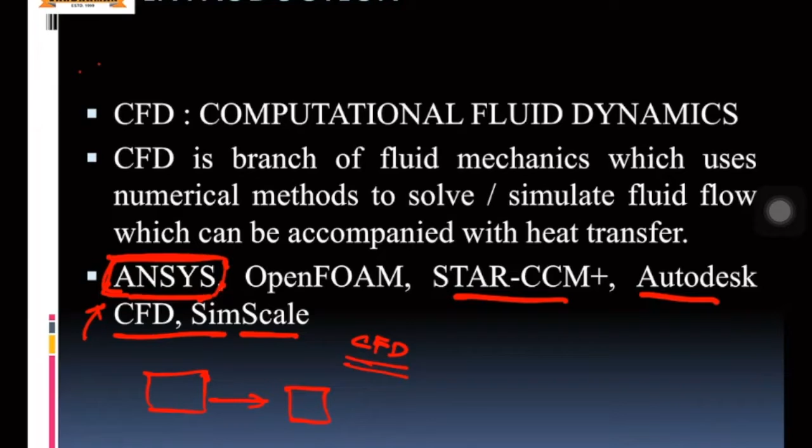But in such cases, especially when it comes to flying objects, these are not possible experimentally, obviously because of the cost involved, you can't just hit and try each and every design. Moreover, there can be a logic that wind tunnels are there, we can do the experiments there, but even wind tunnels are a costly affair. Whereas if you talk about simulations, be it the code made by any person, or be it a professional software, these simulations are very easy to do.

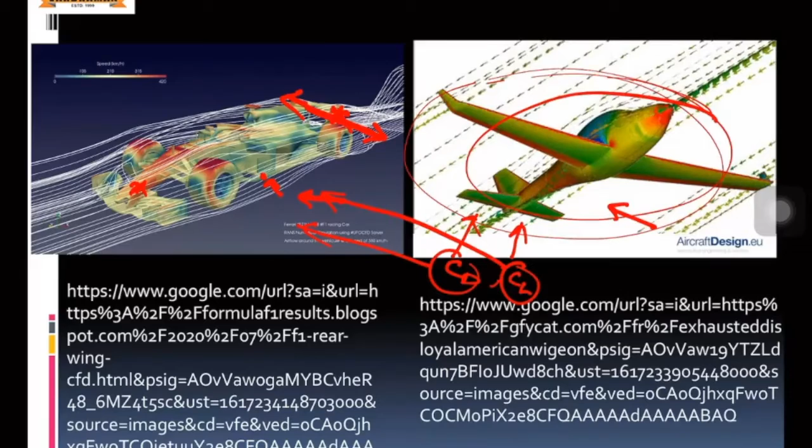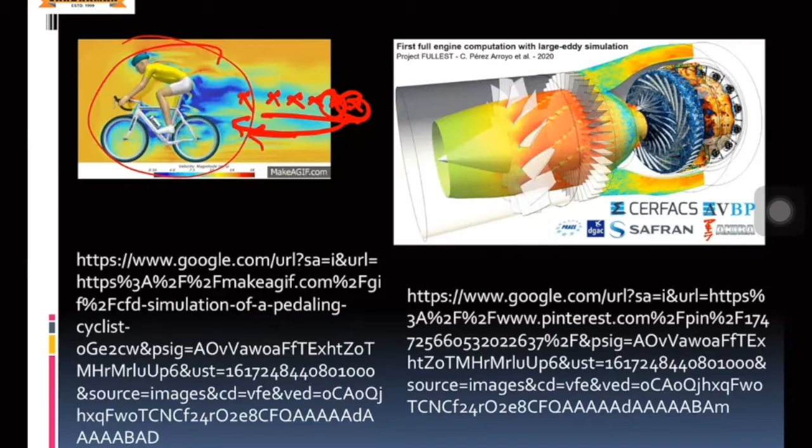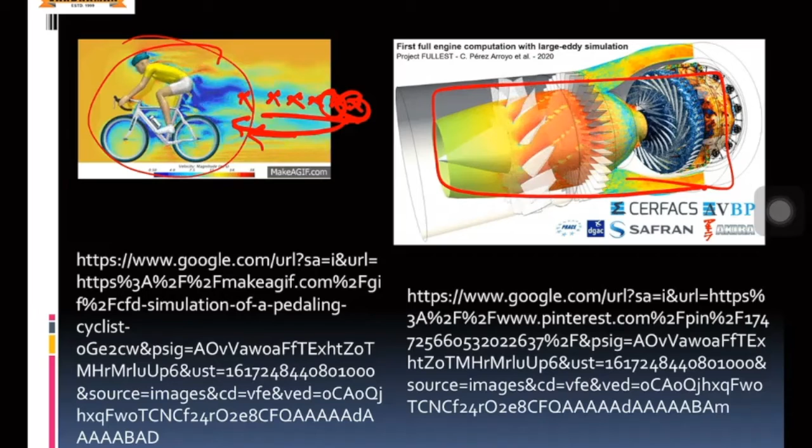So there also they are using CFD, and of course in engines and all, flow across an engine. So there also you can do simulations and study a lot of things, thereby optimizing the design of the engine. Heat exchanger might not be a new thing for most of you, but again, talking about heat exchangers, if you want to do it experimentally, in every nook and corner you can't have the values of velocity, pressure, or see the effect.

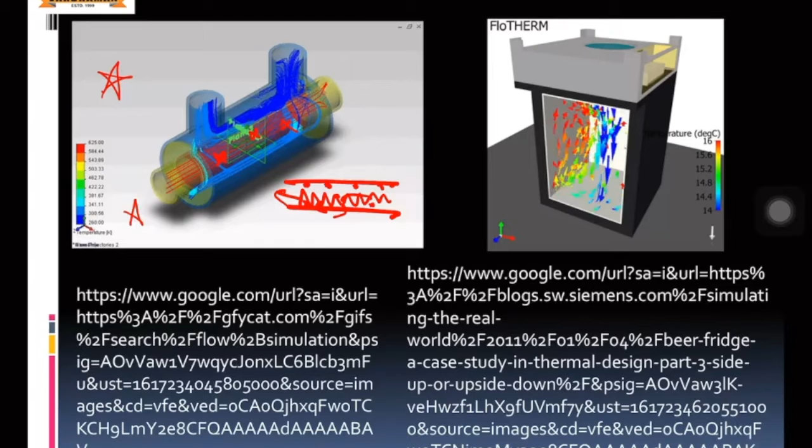Recently, some of my colleagues are trying to do experimental studies on a corrugated plate heat exchanger. So for them, getting this shape of corrugations inside a pipe becomes a challenge itself. And further adding to that, if I want to change the shape, if I want to change the pitch, then experimentally it becomes almost next to impossible. Somehow, even if they are able to make these corrugations, studying the values at each and every internal point becomes the biggest challenge. So in such cases, simulations can be of very much great help.

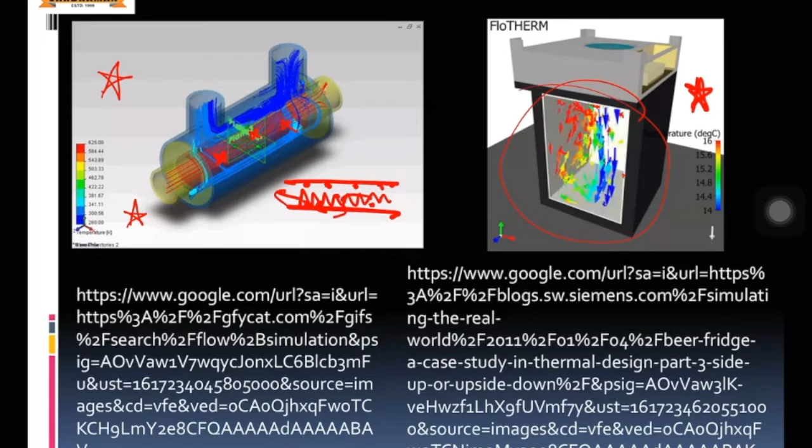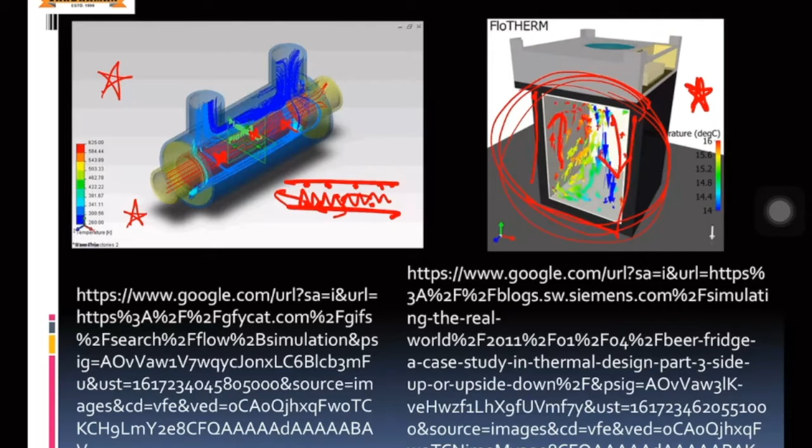Similarly, these things. This is the challenge which I faced when I started teaching basic mechanical engineering, or the thermodynamics part. When we study thermodynamics, most of the students know that in the name of thermodynamics, it is zeroth law, first law, second law, or let's say entropy. That's the end of it. But if we are able to show such simulations where in, let's say, a refrigerated space, the hot air which is red is going up and the blue cold vapors are coming down, then it creates a lot of interest among the students. They are able to see the actual way it is happening, and we can do things like that.

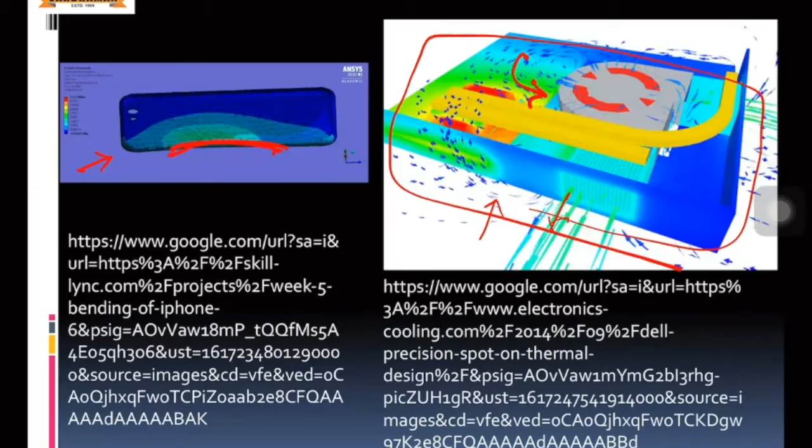You can call it either electronic cooling or electronic packaging, and it is very useful. Considering the present aspects, if you talk of mechanical engineering, especially thermal, this can be an area where we can get ourselves trained and also our students trained, so that they will be getting a lot of potential jobs in the coming times.

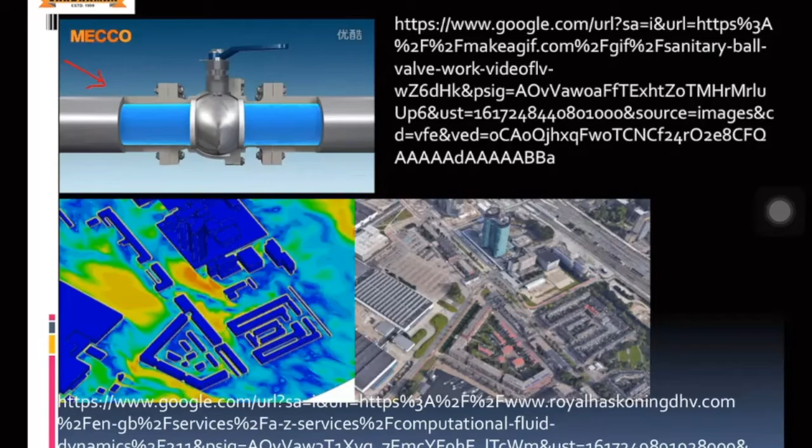In these examples I've taken, the first example is general fluid flow through a pipe: how, when the valve is opening, the fluid is affected. The second example you're seeing here, and the actual geographical photo, is also very useful in these times. Recently, we are talking a lot about smart cities and green buildings. Even in those cases, CFD can be a very good tool to design how the flow is happening across the city, and it can be used for a specific building also. Usually we apply Vastu and all in structures and buildings, but even this can be very helpful.

One good experience I can narrate relevant to this: if any of you have been to IIT Delhi, the basic shape of IIT Delhi is like a C shape. There's one tunnel, a small passage which connects the computer building with the main building. That tunnel is designed in such a way that throughout the year, whatever the weather or season, if you go and sit inside the tunnel, you will always feel a smooth breeze. It's a very soothing experience. So that's also an example of design of a building using the concepts of fluid mechanics and CFD.

And here, of course, you can see the planning of a smart city. On the left side they are showing the animation of how the flow can happen in a smart city. And this is the photograph of the same city.

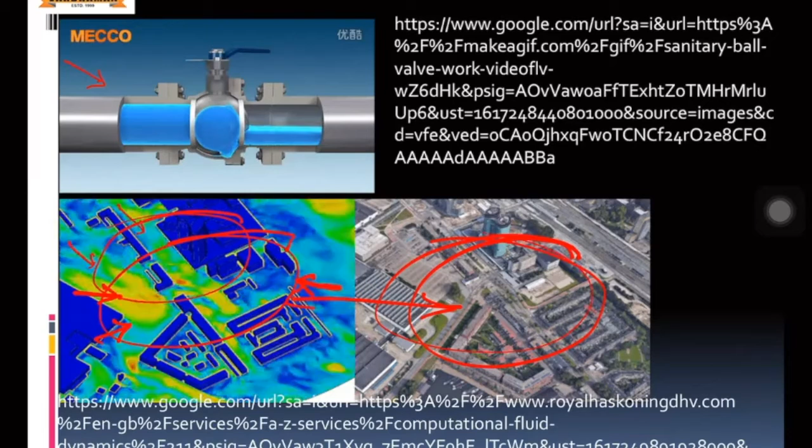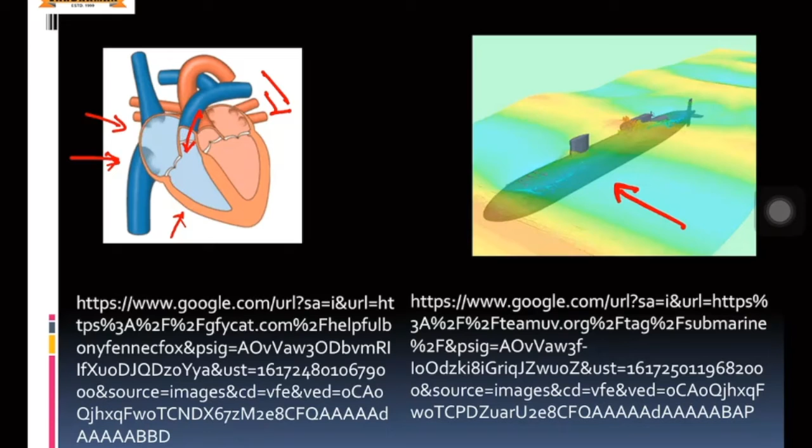But here they are coming to the help, and they are telling a lot of things about the functioning of heart. Even these days, when it comes to submarine or even underwater vehicles, UAVs are a very common concept these days, to send UAVs to such places, like especially in floods, we can send UAVs in such areas where human lives can be costly. So we can send UAVs. So even for those applications, CFD is coming to the help.

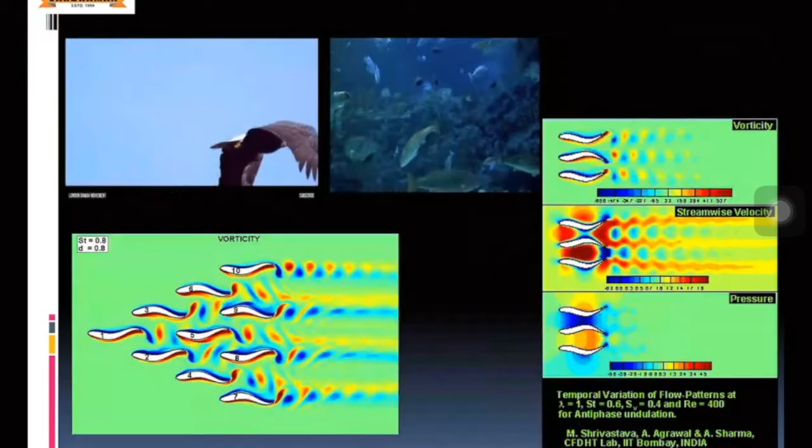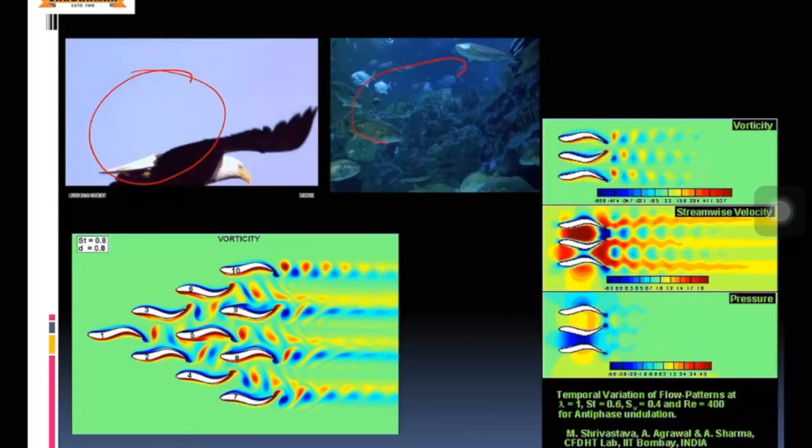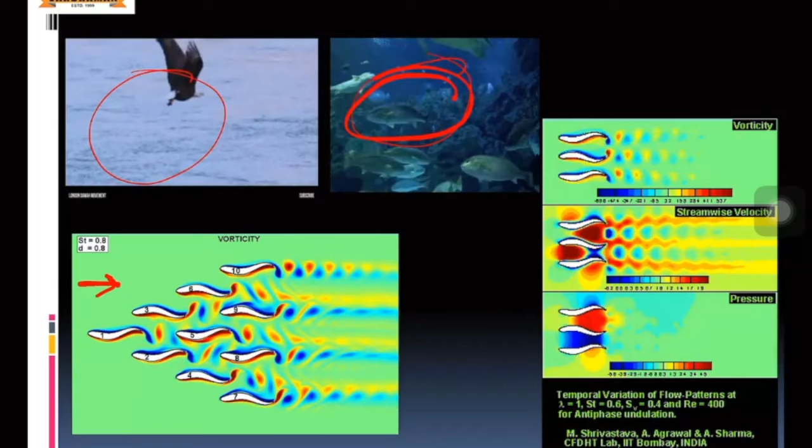And this slide is just a representation of the sort of work which I did in my PhD. Nature is the best source of inspiration, be it the birds flying in the sky or be it fish swimming in the water. So taking the inspiration from the fish swimming, I had simulated this, what we call a school of fish, and these are representing the vorticity which is being shed downflow.

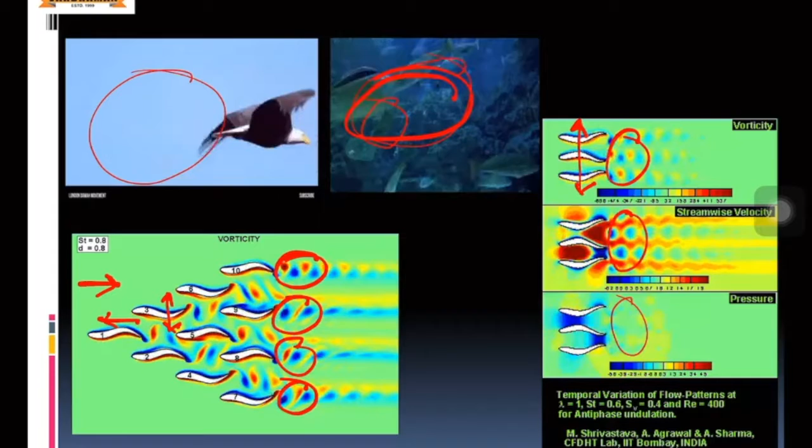And similarly, these are like three fishes swimming side by side, and these are the vorticity, stream, velocity and pressure contours. These can be very helpful in order to understand the working or the flow of UAVs, because we can learn a lot of things from fish, but we can't direct them that you have to flow like this, you have to undulate your tail at a certain frequency. So learning from fish and their motion, we can simulate the same thing and see the effects.

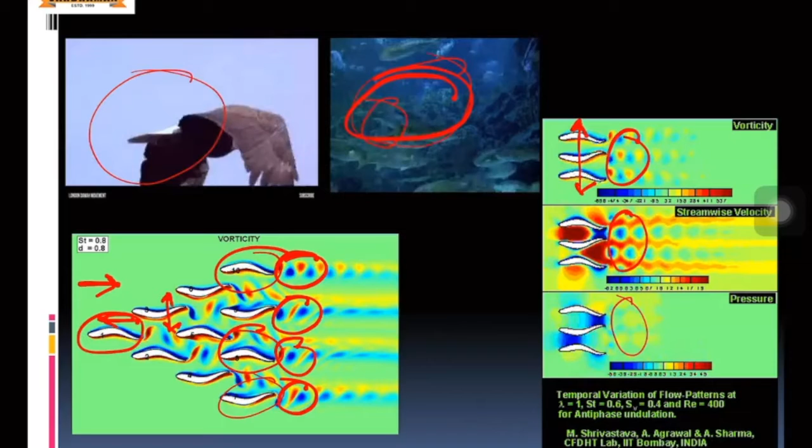A very lovely example of this group type of swimming, or even you might have seen that when birds fly, they fly in a similar structure. The advantage or the disadvantage is the leader, which is here at this point. This leader has to put in the maximum effort to fly or to swim, whereas those who are in the later half are relatively at rest; they have to put in less effort to do the same.

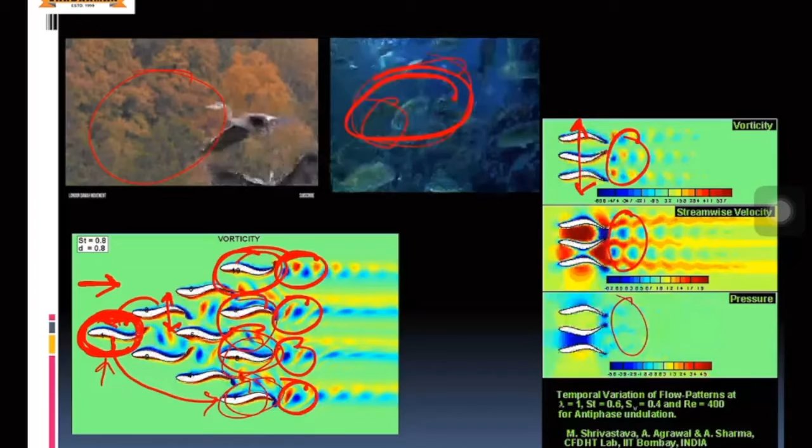So in fishes and even in birds, it has been observed that after some time this leader comes backwards and the other one comes forward. So it shows that this fish or this bird puts in maximum effort, then they come back to take relative rest, and the second one takes charge. So these types of observations we can validate from our simulations. This is one important thing.

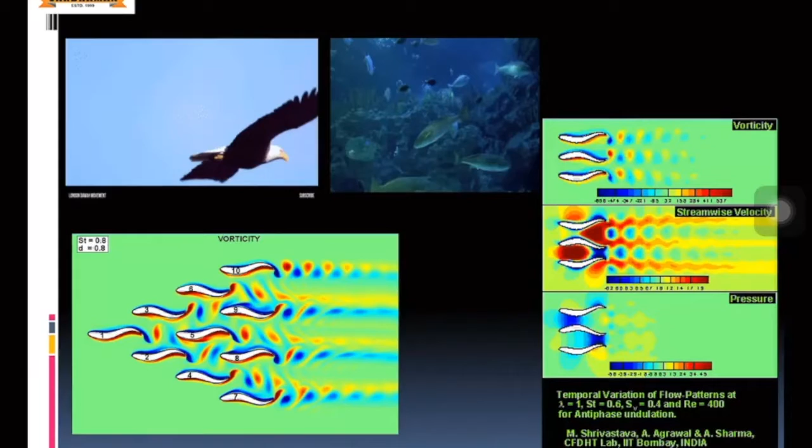Then the second thing is why CFD is needed. Okay, CFD is there. We are doing a lot of things, but there should be a reason. Why not just use fluid mechanics equations or thermal equations or structural equations to do the analysis? Why do we need CFD?

So the answer is, for a fluid flow problem or even other problems, we need a complete solution in a complete flow field. By flow field, let us say if I take an example of a room, and if I want to see temperature, or if the fan is running, the velocities at different points, or even if I put an air conditioner here and want to see the effect of airflow, temperature, and all these things, then I need a complete solution in this room, be it this point, this point, or this point.

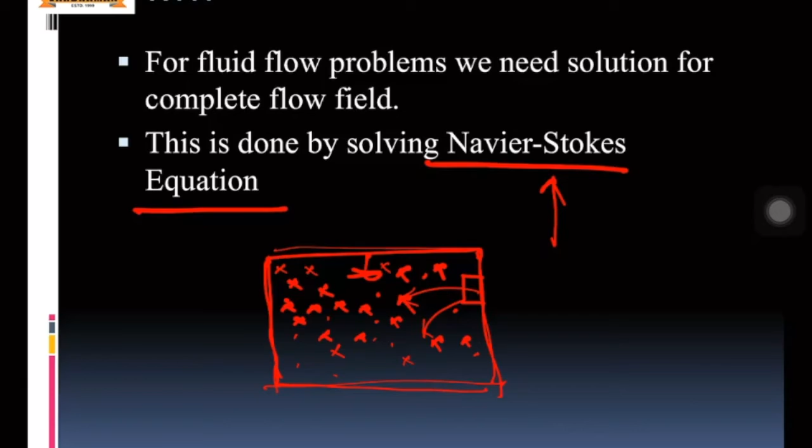So if we are not able to find out, I'll come to that. These are the Navier-Stokes equations that I have represented here. I have taken them from a certain website just to show them to you. So an analytical solution of the Navier-Stokes equations is not possible. The day someone is able to find an analytical solution for the Navier-Stokes equations, that will be the day we will not be needing these softwares, whatever softwares are there.

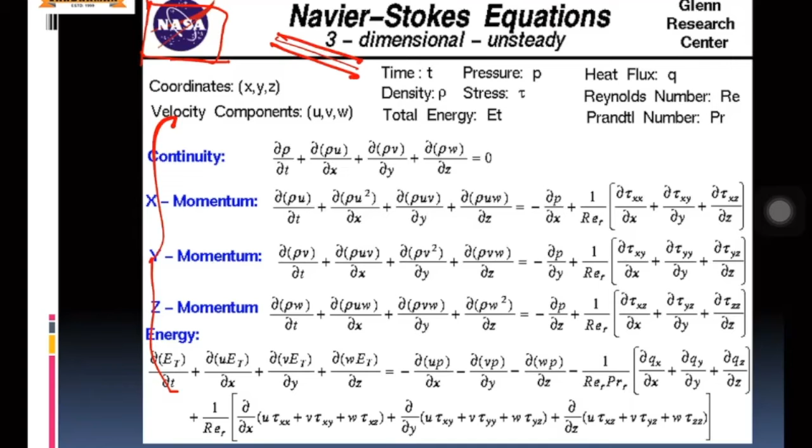So it's a very big challenge. I hope someday someone is able to find the analytical solution to it. But till that time, we'll be needing CFD, we'll be needing the numerical methods we are using. So I've told you that we need certain continuous solutions, we need the solution of the Navier-Stokes equations, and analytically it is not possible. So if it is not possible analytically, then what is the way out?

So this is how a study of CFD, or computational fluid dynamics, is done. First of all, in order to solve the Navier-Stokes equations, the numerical methods come to our rescue. All of us, at some point during our BTech, might have studied a course called numerical methods. I think in our university it is called NACP. When you talk of numerical methods, there are three different methods: finite difference, finite volume, and finite element, which we can use to solve the Navier-Stokes equations and get the solution.

The major difference between finite difference, finite volume, and finite element is that finite difference is solved at discrete points. Okay, we discretize the equation. I'm not going into too many technical details, assuming that this is just an introductory talk to give a taste of CFD rather than going into too many technicalities. So I'm assuming that and following the same thing in the explanation.

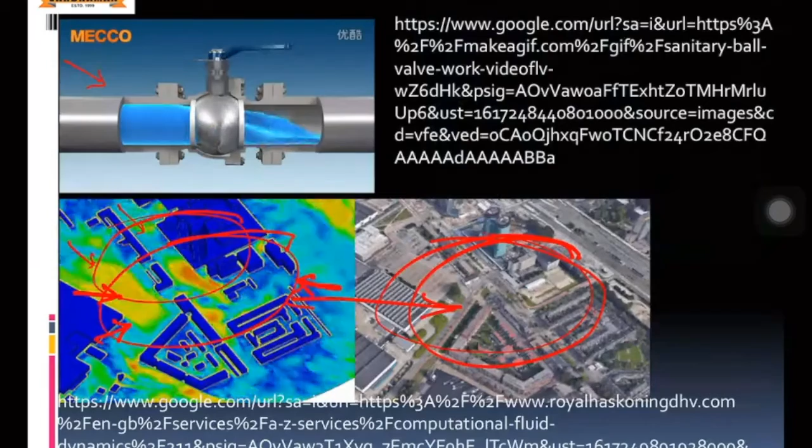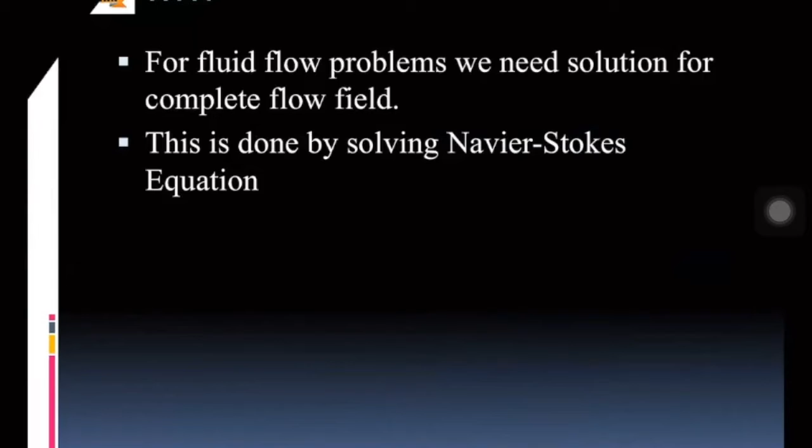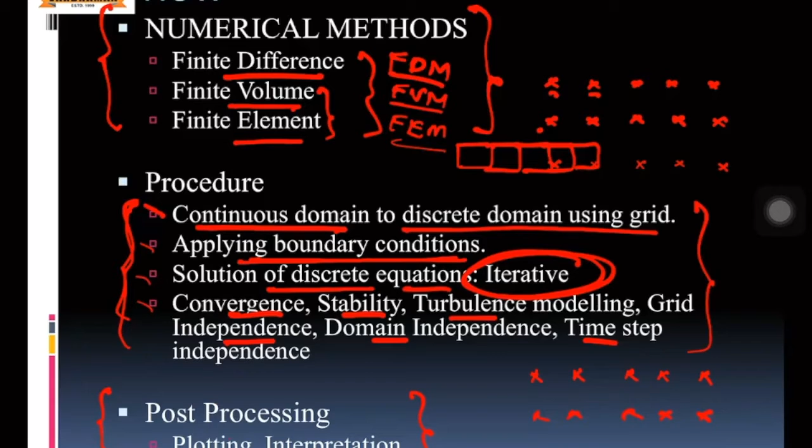So plotting of the data is very important. And after plotting, another important thing is interpretation. If I show you just an animation with a certain velocity, some value, it might be okay. You might feel okay, something is done, some colorful figure is there, some animation is there, but you might not be able to appreciate the efforts or the changes which we need to make. So that comes under interpretation of the data after plotting. So in the post processing, plotting and interpretation is really needed. Without that, there's no meaning of doing CFD.

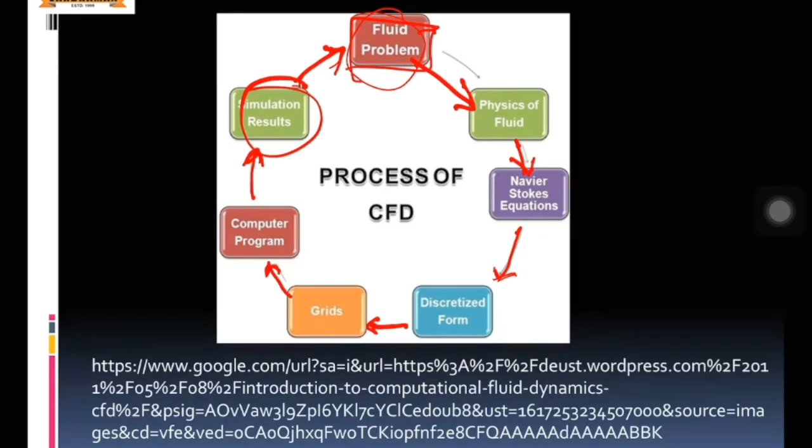So this is just a diagram representing the process: you have a fluid problem or any problem. In order to understand the physics of the fluid, you need to solve the Navier-Stokes equation. For solving the Navier-Stokes equation, we have a discretized form of the equation, which we apply over a grid, and then we run certain simulations or codes on the computer, and then there are certain simulation results, and again this cycle keeps on going. Once you have a simulation result, you might see some changes, you might do certain modifications. So do the modification and it again goes here till the point this fluid problem is resolved to the desired extent.

Starting with grids, I told you a few slides back that the complete domain is broken down into grids. When we talk of grids, there are different types of grid, with their own advantages, disadvantages, and applications. Even all these are not completely covered; day by day, as we are developing in the area of CFD, more grids are coming, but still the basic classification is there: Cartesian grid.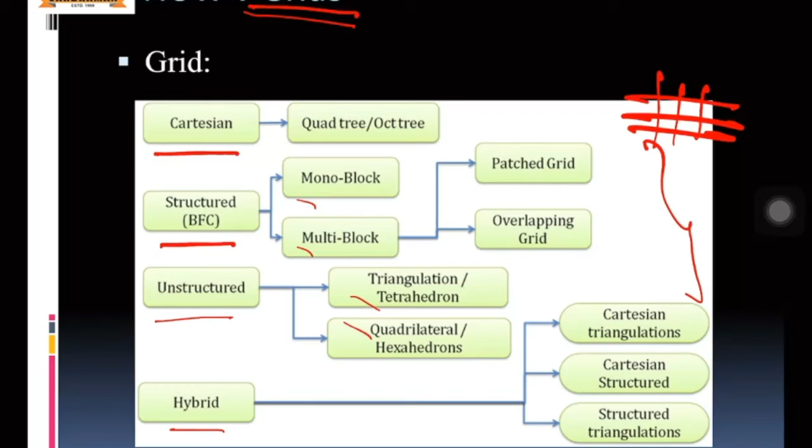What you know is just the Cartesian grid. Then there are structured grids, unstructured grids, which I'll show very soon in the next slide. And there are hybrid grids. Further, there are many classifications: monoblock, multi-block, different shapes of grids. So there are different ways of classifying the grids.

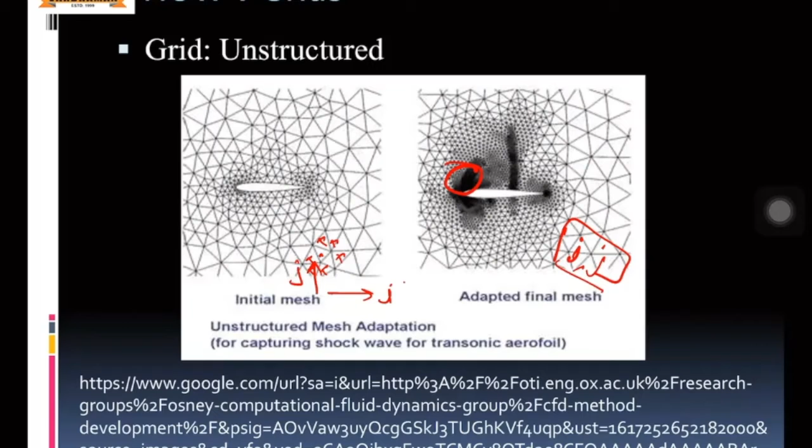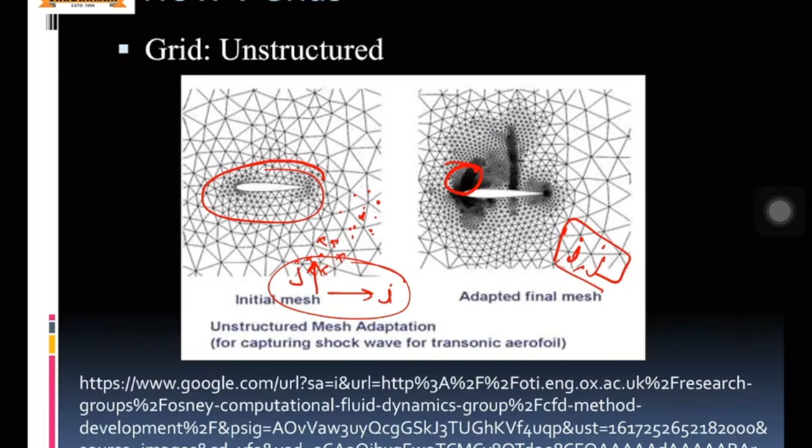Fine, but this information will be stored individually. You can't have that i is running in this direction or j is running in this direction. That type of structured continuity in i, j or the numbering can't happen. So here each element's information is stored and its neighbor is stored. So even unstructured grids have their own advantages as compared to structured grids.

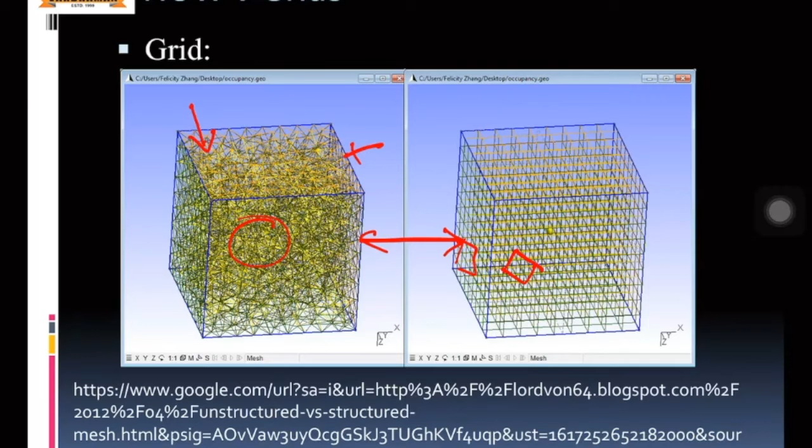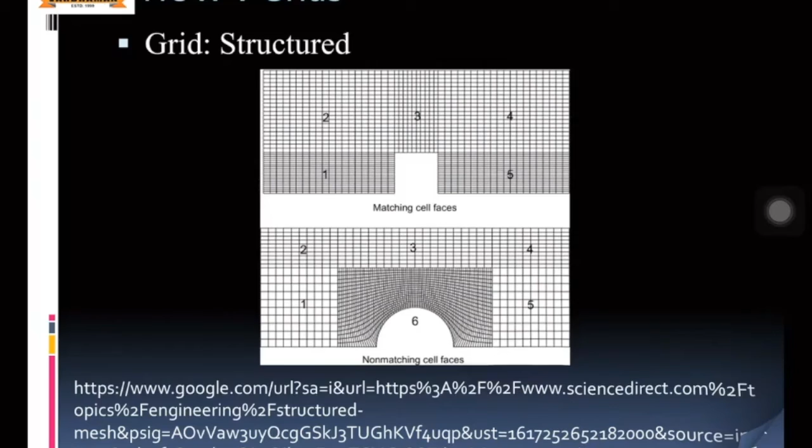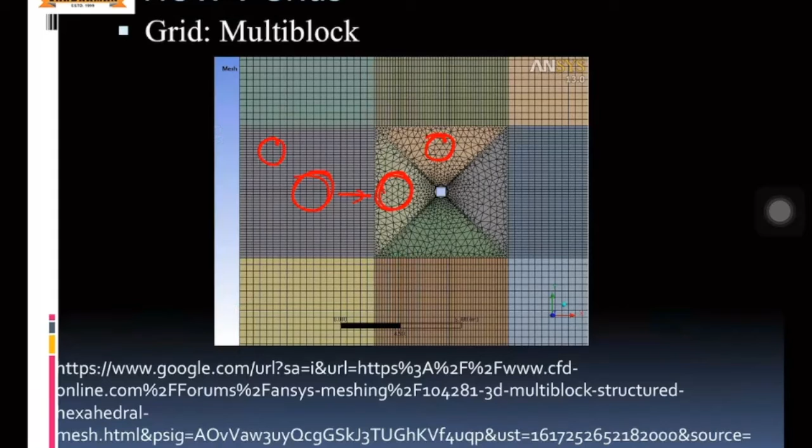This is just an example to show you a multi-block. Multi-block has a definite advantage. What I told you just now, that neighbors will be defined, and another advantage of multi-block is here you are having unstructured, and here you are having structured. The earlier multi-block diagram which I had shown you was more of a structured one. Every block was structured, but multi-block does not mean that it cannot have a combination. It can have a combination of unstructured as well as structured grid. Okay.

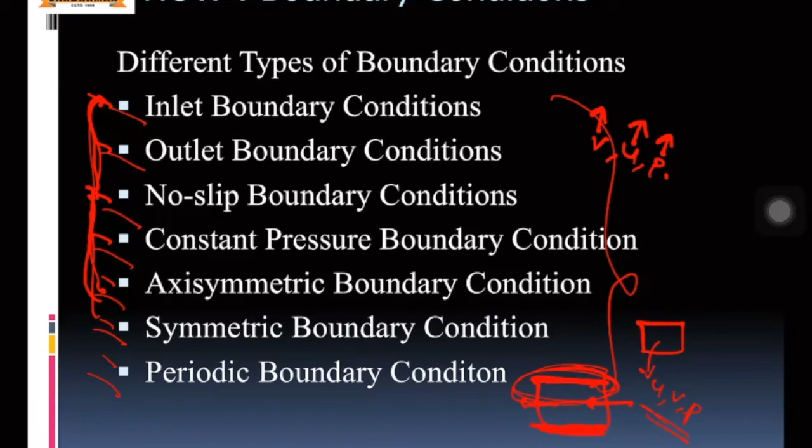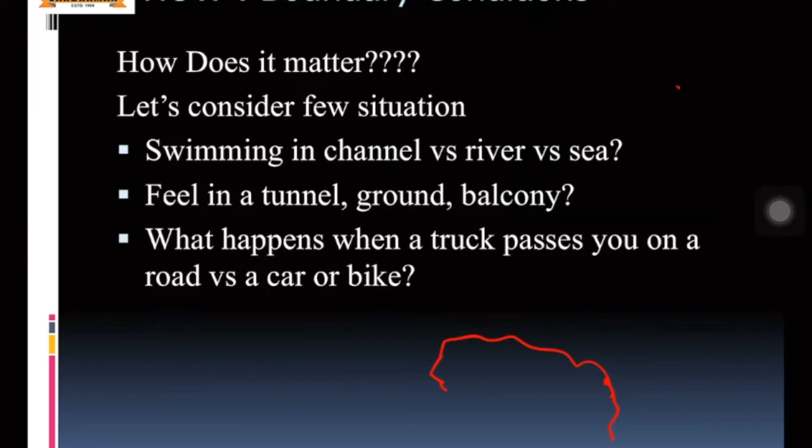So by changing these boundary conditions, by changing these equations which you apply in boundary condition, it might be a physical feel that you are standing in a tunnel and suddenly by changing the equation, this complete wall is gone because you have changed the boundary condition on this wall. So the boundary condition applications are very important because while simulating, you might have a case where you are simulating a swimmer swimming in a sea, and suddenly you change the boundary condition. It feels that here is a channel, and the swimmer is swimming here, and here it is sea, which is practically not possible.

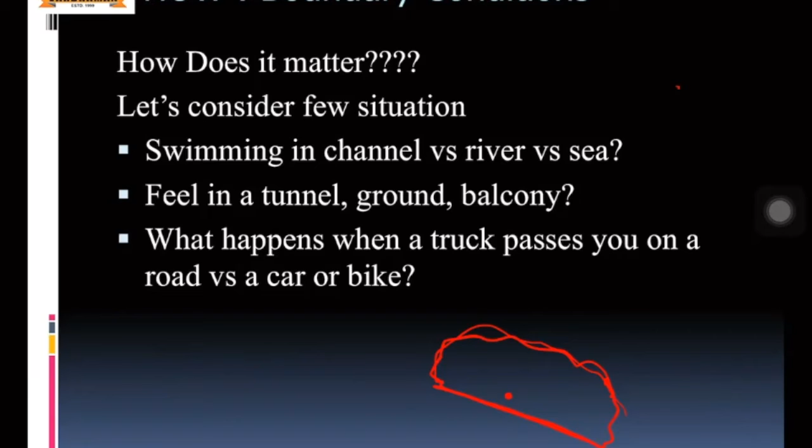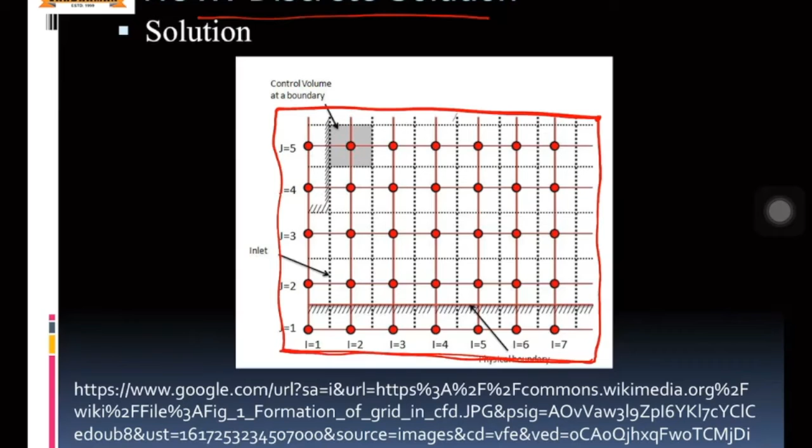So the application of boundary condition is very important to simulate the thing which is happening physically. If you are not putting boundary conditions properly, then you will be getting very vague results which are not physically possible. Then coming to the next thing: initially it was grid, then it was boundary condition, and now discrete solution. So this is what I was telling you, that if you want to solve the equation for this domain or this area, then we discretize it in terms of different points, or you can consider it as different control volumes or different cells. And in each of these points or cells, we solve the discretized equation.

So what we mean by discretization is, the Navier-Stokes equation is a continuous equation. So ideally, if someday we are able to find out the analytical solution of Navier-Stokes equation, then you pick a point and you can know the values. Whereas the difference with this discrete solution is, here we'll be finding the values at discrete points, and if we want at some other point, we need to average out the values of the neighbor. Discretization, I can say, is a necessary evil. If you want to solve Navier-Stokes equation, you need to discretize the equation. But the disadvantage is, it will not be continuous. You'll have definite values at definite points, but intermediately you need to find out the average.

If you want your solutions to be more accurate, the number of elements or cells should be maximum possible, till the point you can afford. You might think why not take infinite number of points or more number of points, but again it becomes computationally expensive, which we can't afford. Afford does not always mean financially. If you talk of commercial applications, all these industries, when they go for simulation, they will not allow you to do certain modification.

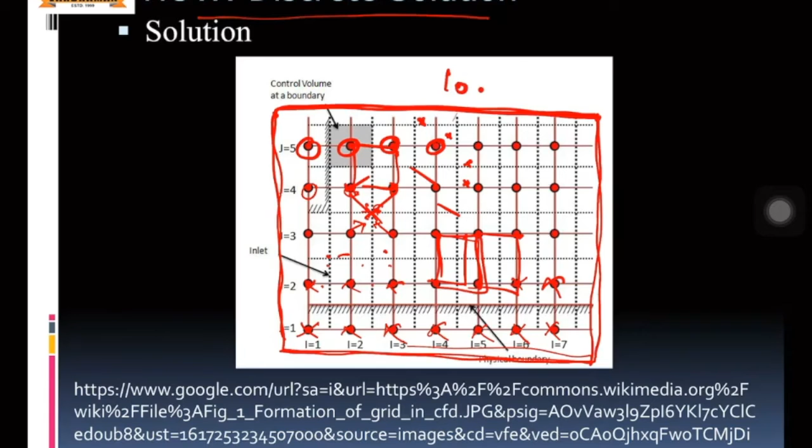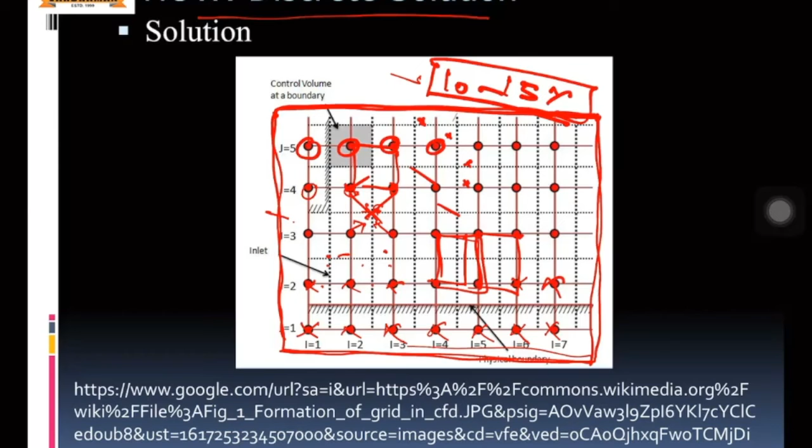They will not allow you to do research for 1 year, 2 year, 3 year. They want immediate results. So if you have certain problem, and even if you are giving some solution which is giving you a betterment of 10 to 15%, the solution is good enough. So because of this, we can't have more number of cells. We need to do it in certain time frame, and if you want to control the time frame or the amount of time in which you are solving these equations, you need to have decent number of grid points rather than infinite.

The next thing was convergence. I had discussed with you regarding myths. First was CFD is ANSYS. No, ANSYS is a tool. Okay, like that. Here, when I'm talking about this convergence, there are different types of convergence. First is domain. By domain, I mean to say, when we do the simulation, we consider certain domain around the simulation. If I want to simulate anything like an object here, then I will take certain area, and in this area I will have grids and I will simulate.

So when I'm considering this domain size, let's say this is capital Y, and this object size, let's say small y, then this y as compared to capital Y, or this small x with respect to X, that I mean to say the dimension of the object with respect to dimension of the domain, it will affect the results or the accuracy of the result which you are getting towards the end. So there is a study called domain independence study.

What is done in domain independence study is, let's say you take a certain domain, do the simulation, check any result. Let's say certain object, coefficient of drag. Okay, so you take this object, take a domain, calculate coefficient of drag. Now let's say increase the domain. Let's say double the domain, keeping the grid size same. You increase the domain, again check the value of CD. It will definitely change. But you see what is the variation of change.

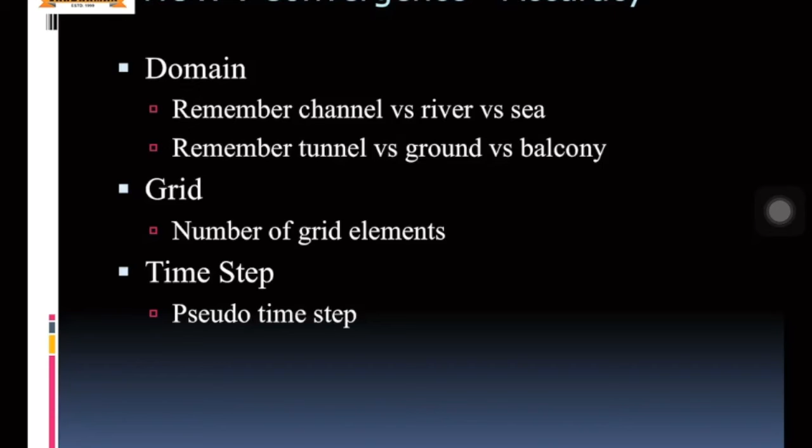And the third is time step. For time step, even if you are doing certain transient simulation or non-transient simulation, static thing, whatever you are doing, the results vary with time. When we do the simulation, there is certain time step, pseudo time step, which we have in simulations. So this pseudo time step will have effect on accuracy. The smaller is the time step, you might get more accurate results.

So even for time step, keep on reducing the time step and keep on checking the change in the value of certain definite parameter, and you take the least time step when the accuracy or the variation is within the desirable limits. So before going for detailed study, detailed simulation, and this is something what most of the students, most of the people who are trying CFD casually don't do, before doing anything, especially researchers.

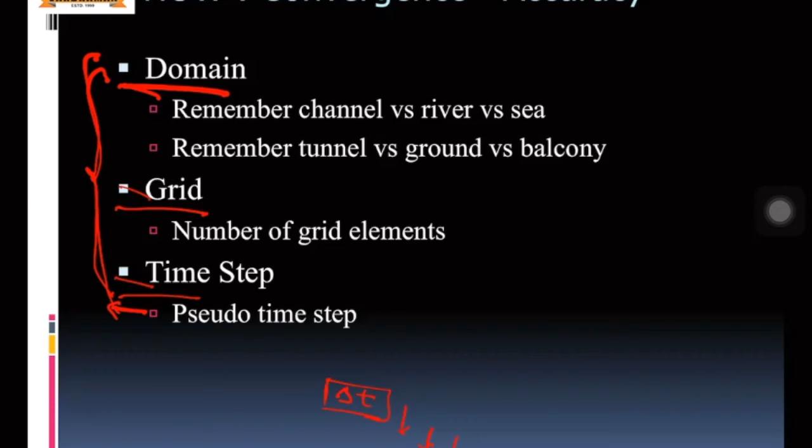If some of you are involved in PhD or something, then before going through thorough simulations and all, do the domain independence study, do the grid independence study, and also the time step independence study. Once you are done with that, take that domain, take that grid, take the time step, and then you can do the research or whatever you want to.

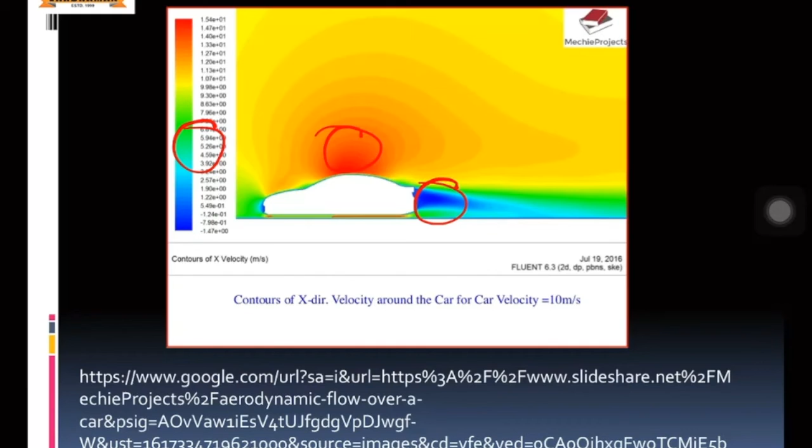But just by showing this figure, a layman who doesn't belong to the area or doesn't have understanding can ask: what is this color, what is this color, what should I understand, what should I take from it? So we don't have anything. Or the same person says, okay, don't do this, just do the simulation of this thing. The colors will of course change, but how does that change of color matter to that person?

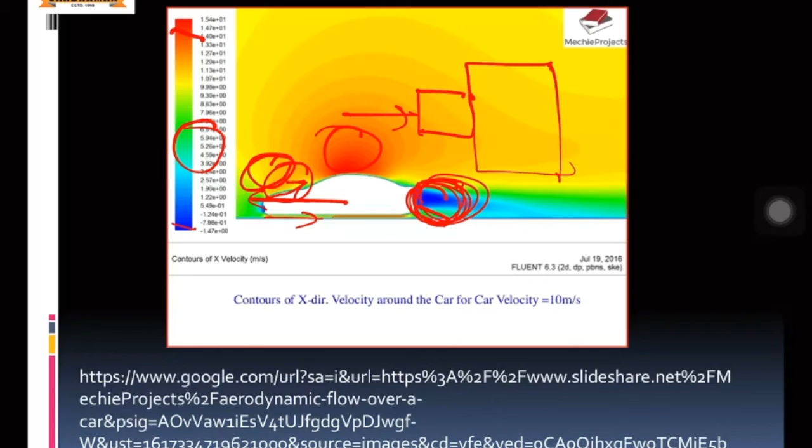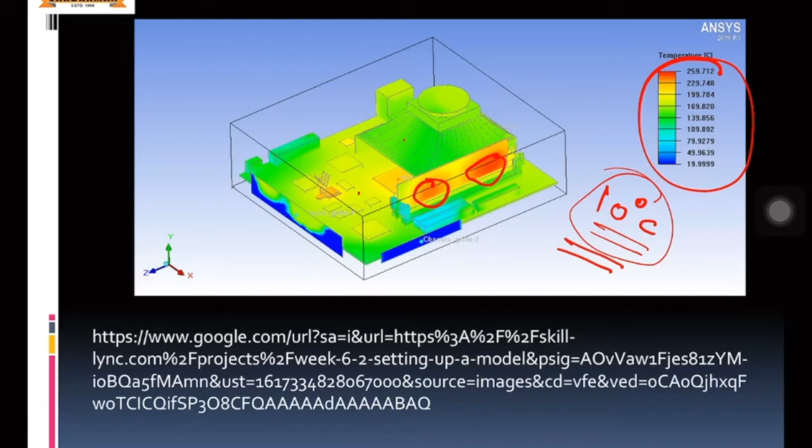Similarly, the same applies here: if I'm doing electronic cooling, in what area do I want the temperature to be less? As per one study, for every 10-degree rise of temperature, the probability of failure of that electronic component increases by a large percentage. In electronic components, most failures happen because of thermal stresses, not other structural stresses. So even here, the interpretation and understanding of the changes becomes important.

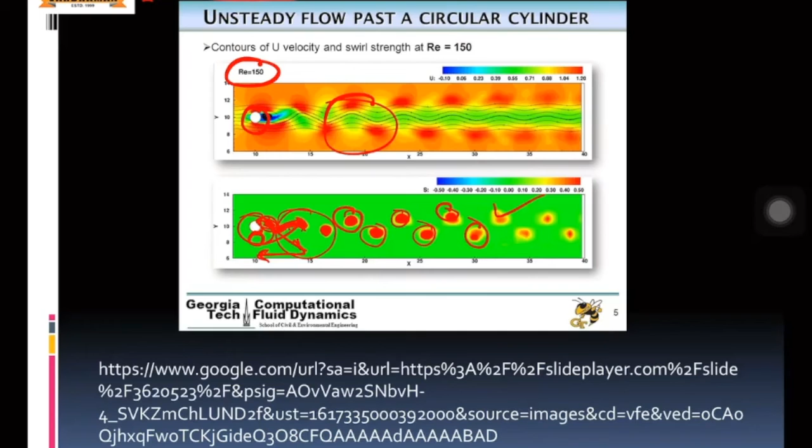So these were the few things I wanted to share with you. I might not have gone technically too much into depth because 1.5 hours might not be enough. This is like a complete sea to understand. But this is what I wanted to share on my end.